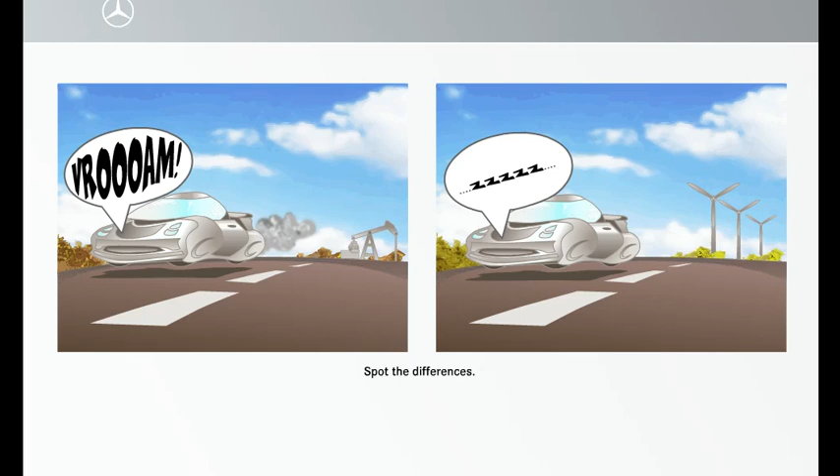Welcome to the CBT program on alternative drive systems, which gives you a solid introduction to alternative drives by providing a general overview of this topic.

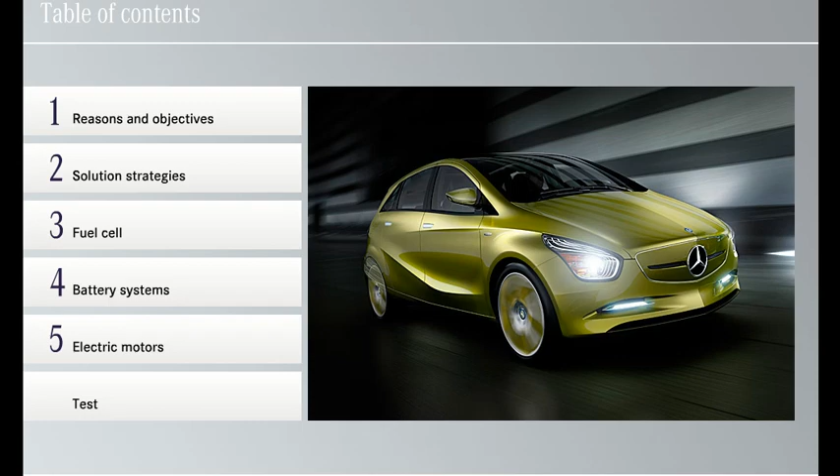The planet's reserves of crude oil are not infinite. How is our consumption of this fossil resource progressing? Since the turn of the 20th century, the extraction of oil has increased incessantly, interrupted only by the two oil crises. A reversal of this trend is currently emerging.

The oil fields which can be easily developed are no longer abundant in oil, while few new oil fields are being discovered. According to the peak oil theory, this means that half of the planet's resources of crude oil have been depleted. At the same time, demand for crude oil continues to grow. On top of this, the process of extracting the remaining oil is becoming increasingly time-consuming. The upshot of all this is increasing oil prices.

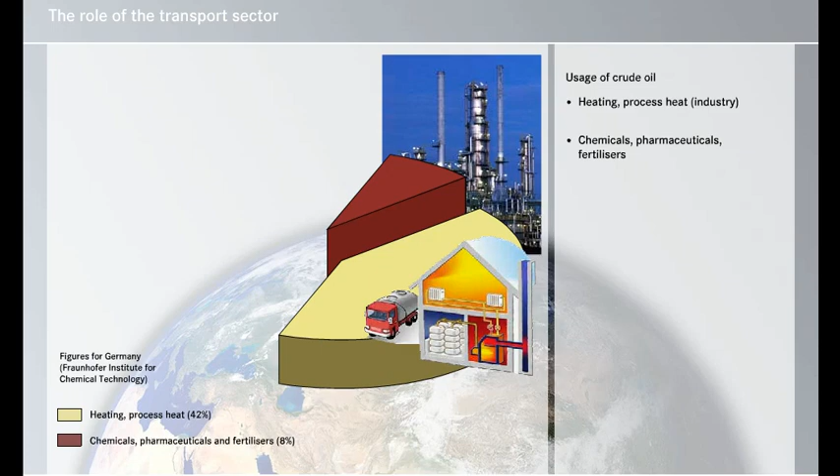Crude oil has a whole variety of uses. A large proportion is, for example, used for heating, for the manufacture of pharmaceuticals and chemicals, of which fertilizers account for a large quantity, for making plastics, and of course, for fuels: petrol, diesel, and kerosene. The global transport sector as a whole represents the largest consumer of crude oil, with around 46% of total consumption.

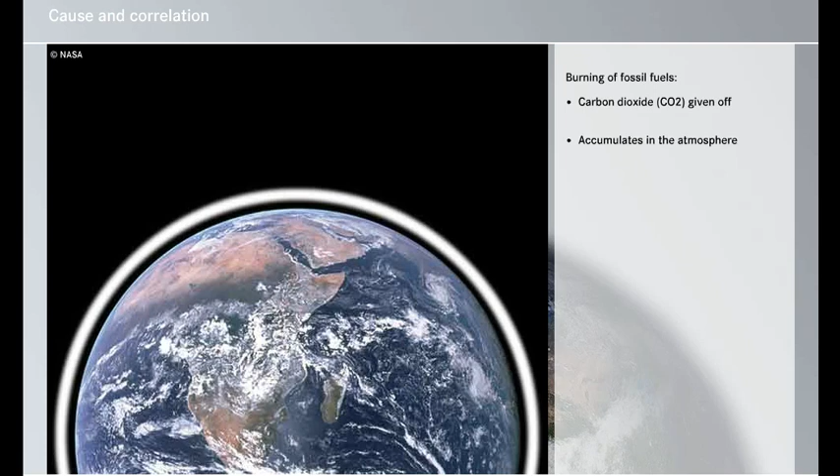When fossil fuels such as coal, oil, and natural gas are burned, they give off carbon dioxide, or CO2 for short. Although this gas is not toxic, it accumulates in the atmosphere. This has the same effect as the glazing of a greenhouse. Sunlight can enter, but the heat cannot escape.

The result of this greenhouse effect is that the Earth's surface, the oceans, and the atmosphere are becoming warmer, something which has predictably dramatic consequences for life on our planet, not just biologically speaking, but in economic and social terms too. However, there is a burgeoning global demand for improved quality of life and especially mobility. This has so far led to a steady increase in CO2 emissions. If you wish to learn more about the CO2 cycle, click on Extra Info.

The counter-argument is that humans and animals breathe out carbon dioxide too, and that the gas is also released by decaying plant life. This is indeed correct, but the fact is that the same quantity of carbon dioxide has previously been absorbed by plants through photosynthesis. It forms part of a cycle that has been continuing for thousands of years.

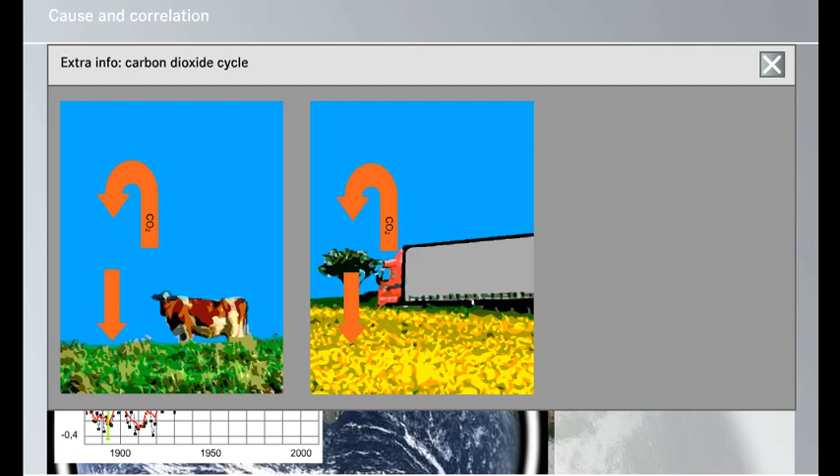The same is true of biofuels, meaning they can be designated nearly CO2 neutral, assuming that cultivation and processing have been carried out in an ecological manner. The decisive factor for climate change is the additional CO2 that is produced by the combustion of fossil substances and upsets this balance.

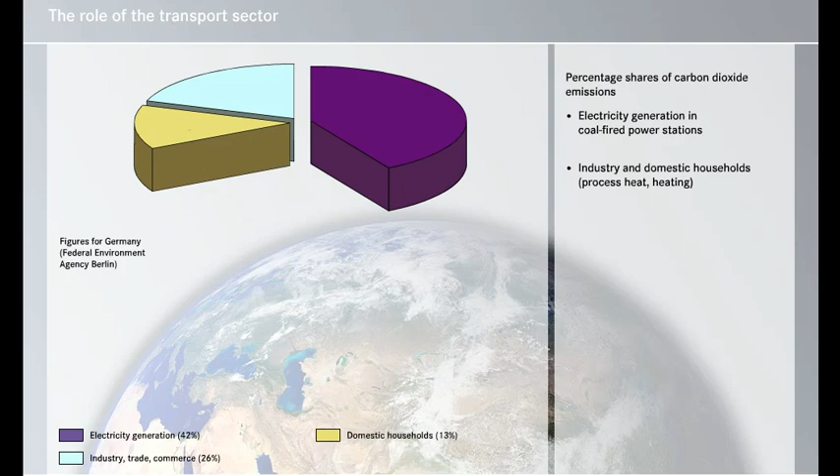What does the breakdown of CO2 emissions look like? The lion's share can be attributed to the electricity industry, which produces energy in coal-fired power stations. This is followed by industry and domestic households, where heating is needed for manufacturing processes and comfortable living respectively. Transport worldwide, meanwhile, only ranks third for CO2 emissions, with just over 20% of the total.

In order to halt climate change, CO2 emissions from all sources have to be cut. In other words, from electricity generation, from industry, from households, and from the transport sector. Politicians are attempting to steer the course of development by imposing general requirements, which vary from region to region. In the European transport sector in particular, CO2 emissions from passenger cars are meant to be reduced to an average of 120 grams of CO2 per kilometre by the year 2012.

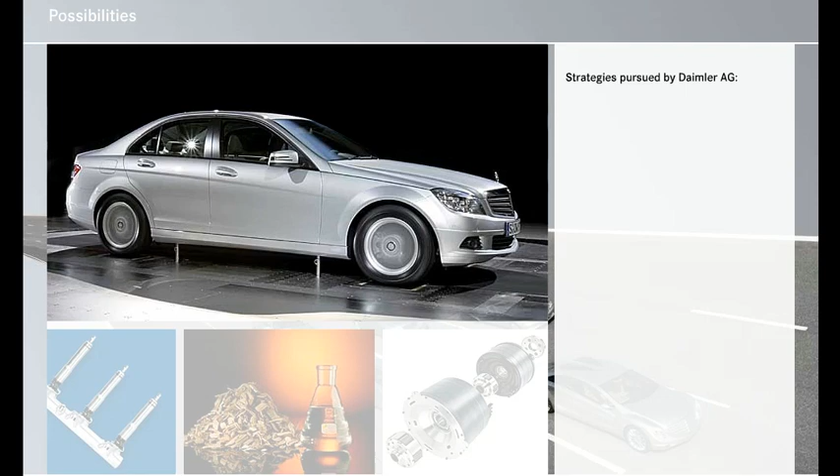There are various strategies for reducing CO2 emissions and fuel consumption, which are all being pursued at Daimler AG. Optimization of the vehicles in terms of rolling resistance, aerodynamics, and weight. Optimization of the internal combustion engines. For example, petrol engines with direct injection technology, known as CGI for short, or low-emission BlueTEC diesel engines.

The development and deployment of alternative fuels such as natural gas, biofuel additives, synthetic fuels, and second-generation biofuel, which can all be used in conventional combustion engines with either little modification or no modification at all.

And finally, the development and application of alternative drive systems, such as the hybrid drive, the fuel cell drive, and the electric drive. This CBT program deals exclusively with the latter of these, alternative drive systems.

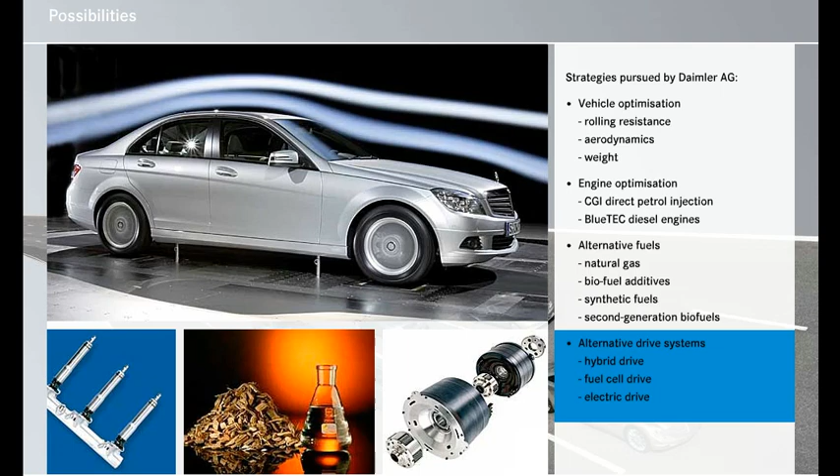Alternative drives are suitable for reducing fuel consumption, thereby lowering emissions in general, but most importantly, CO2 emissions, and increasingly for harnessing renewable energies too. If you wish to learn about the difference between fossil fuels and renewable energy sources, click on Extra Info.

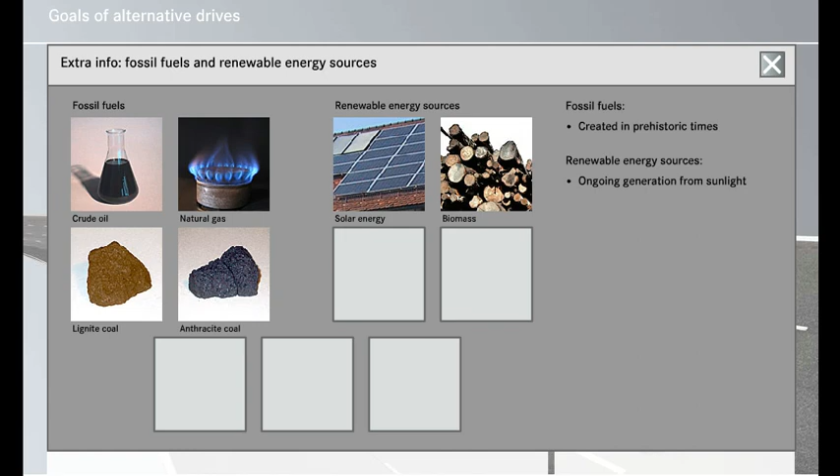Fossil fuels developed in prehistoric times from plant and animal material. They include crude oil, natural gas, lignite coal, and anthracite coal. Renewable energy sources are derived on an ongoing basis from sunlight. They can be infinitely replenished, i.e. renewed, hence their name. They include not only sunlight itself, but also biomass, wind energy, and hydropower.

The only other resources on Earth are primary energy sources, which date back to the creation of the solar system. Radioactivity, for example, in the form of uranium, geothermal energy, as well as the tides, whose origins lie in the movement of the celestial bodies. As the planet's reserves of uranium are limited, they are often counted as a fossil fuel, while geothermal energy and tidal movement are classified as renewable energy sources due to their virtually inexhaustible nature.

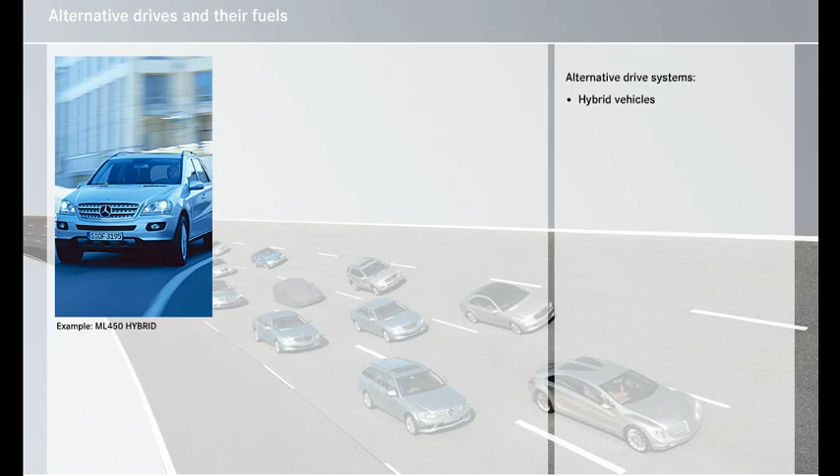The following types of alternative drive are to be examined in greater detail: hybrid vehicles, fuel cell vehicles, and electric vehicles. What fuels do these various alternative drives run on? Hybrid vehicles are refueled in the conventional manner with petrol or diesel. Fuel cell vehicles are powered by hydrogen, and electric vehicles run on electricity.

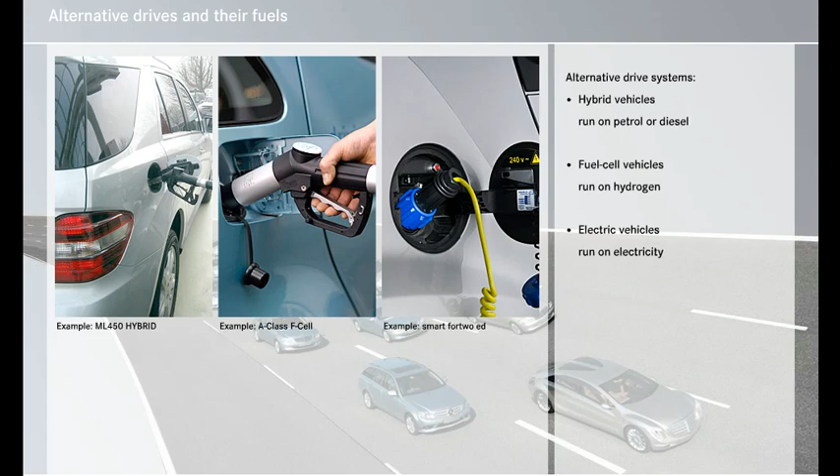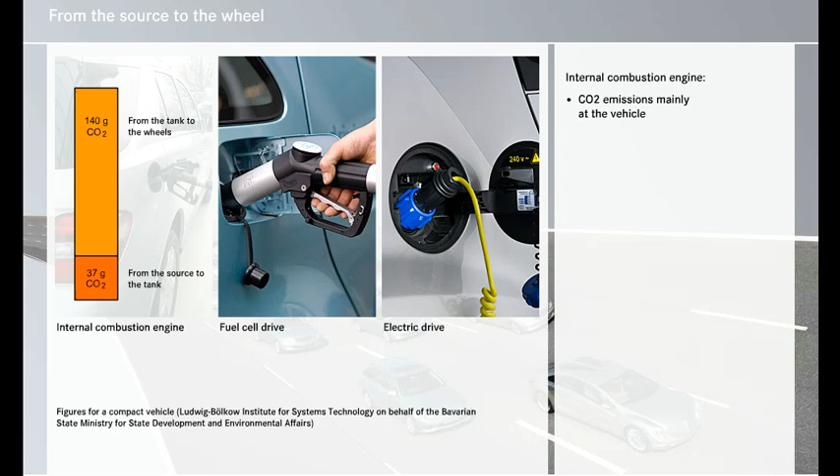However, the whole climate and resources issue has to be considered from a wider perspective, from the original source of energy all the way to the moving wheel. On a hybrid or a conventional petrol or diesel-powered vehicle, the majority of the CO2 release takes place at the vehicle itself. Only a relatively small proportion occurs during extraction and transport of the crude oil and manufacture of the fuel.

Although operation of a fuel cell-powered vehicle is emission-free, the overall CO2 balance sheet is not necessarily that much better. Currently, hydrogen is produced from natural gas or accumulates during the smelting of iron ore. Both processes give off CO2, so it is not produced at the vehicle but at the fuel supplier instead.

It is a similar story for electric vehicles. Part of the electrical power required comes from coal-fired power stations with relatively high CO2 output. Some of the electricity is also drawn from atomic power and renewable energy sources, which are, however, CO2-free. The balance sheet is far more positive if the electrical power is generated from renewable sources, such as the sun, wind, and water. In other words, without any release of CO2.

And if this electrical power is used to generate hydrogen by the electrolysis of water, the overall CO2 balance sheet likewise improves. Liquid fuels can, however, also be produced using renewable means. Currently, field crops are used, but in the future, it will be possible to extract biodiesel, as it is known, from any plant material, such as wood residue, straw, or grass and tree cuttings. This will cancel out the vehicle emissions, although some CO2 will still be generated as a result of cultivation, extraction, and manufacture.

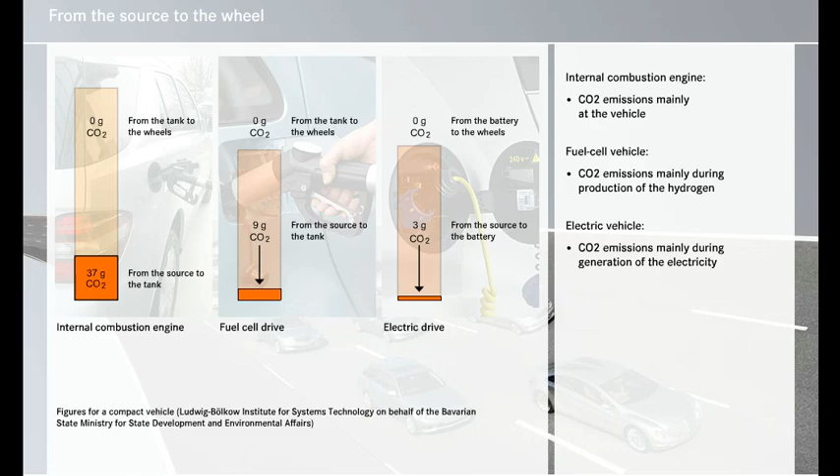Let us now consider the principal characteristics of hybrid vehicles. Hybrid vehicles have at least two drive units: a combustion engine and an electric motor, which is integrated into the transmission on this model. Engine and motor can each be deployed on their own or in unison with one another in order to optimize operation in terms of energy consumption. When kinetic energy is released, for instance, while driving downhill or braking, i.e. with the engine in overrun mode, the electric motor acts as a generator.

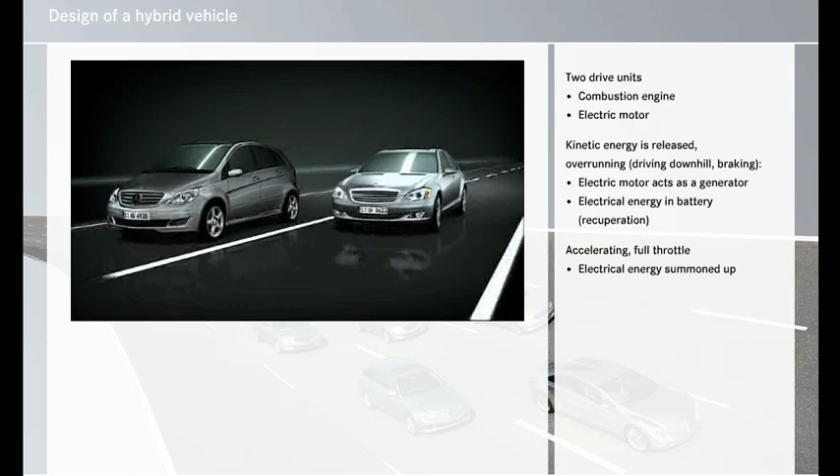The electrical energy is stored in a battery. This process is known as recuperation. When accelerating or at full throttle, the released energy can be reused. The electric motor helps the combustion engine to power the vehicle.

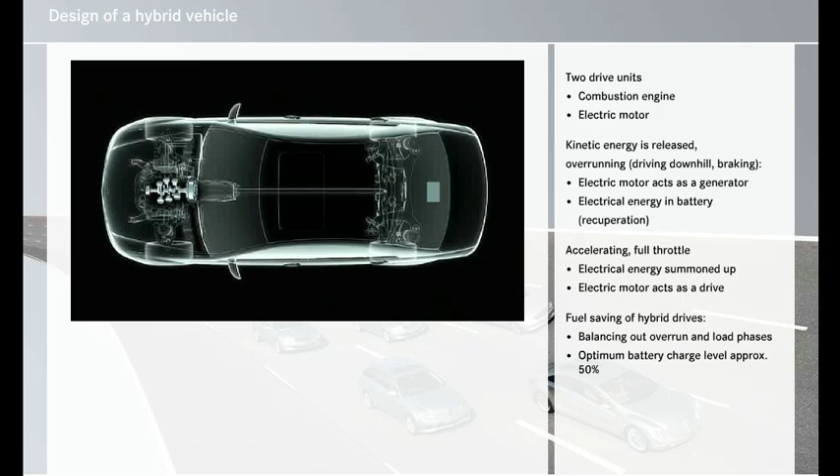The advantages of the hybrid drive are lower fuel consumption, resulting in lower CO2 emissions too. Besides this, there is a further plus point too, namely increased torque. As you will find out in Chapter 5, electric motors, unlike combustion engines, generate their maximum torque from stationary. So not only is environmental compatibility increased, driving pleasure is boosted too.

This comes at the expense of a number of drawbacks, however. Increased technical complexity resulting from the two drive types, combustion engine and electric motor. A higher weight due to the additional components, as well as the resulting increase in costs.

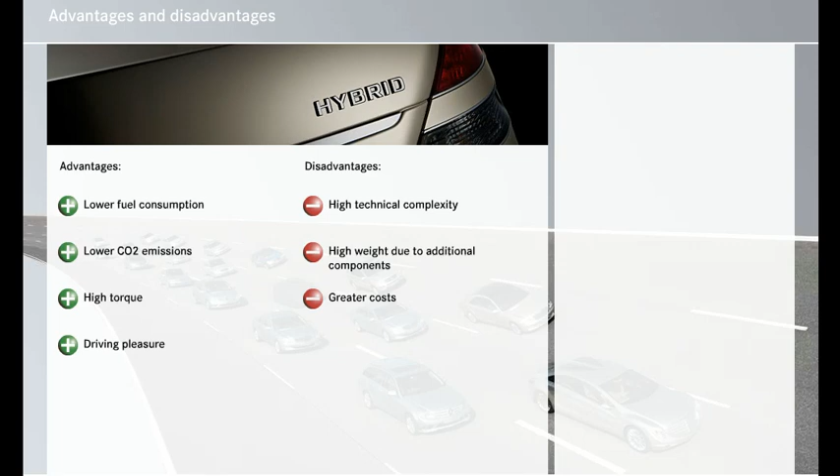The pros and cons of the various drive setups need to be weighed up carefully to evaluate the impact on fuel consumption and CO2 emissions. A vehicle which is predominantly driven in city traffic, stopping and accelerating frequently, can benefit from a hybrid drive system. However, a vehicle which is largely driven at a constant speed over long distances should not be burdened by the extra weight of the hybrid drive technology. In this case, a modern diesel engine proves to be more efficient.

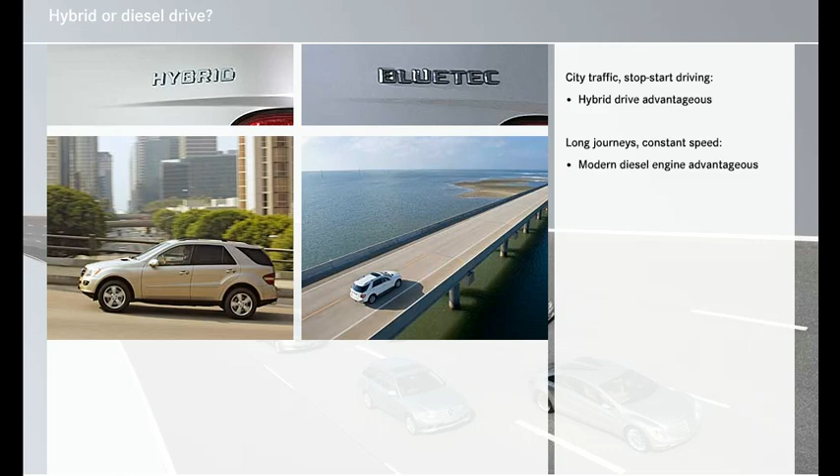Now let's take a look at the fuel cell drive. Hydrogen, which is stored in compressed gas tanks, reacts with oxygen from the atmosphere to generate electrical energy in the fuel cell, which is in turn used to feed the electric motor. In overrun situations, this electric motor is also able to function as a generator and convert kinetic energy into electrical energy. Consequently, a battery is also required in order to store the electrical power generated during overrun phases, or put it on tap again for peak load phases. Move the cursor over the diagram to display the various components.

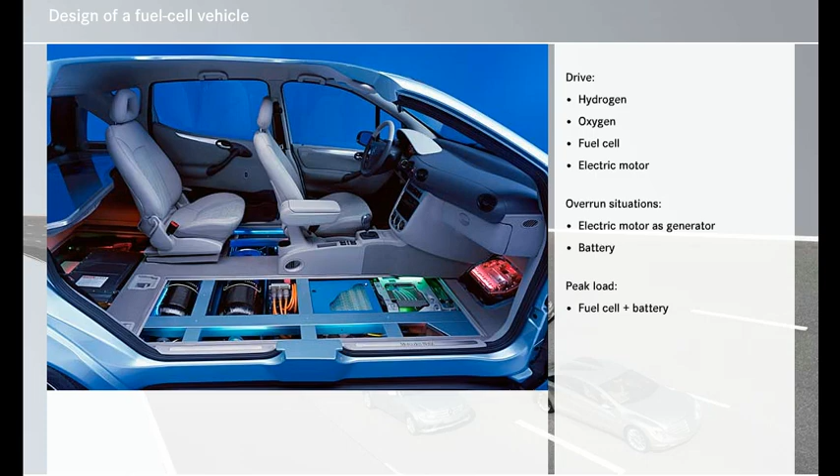The principal benefits of the fuel cell drive include the low energy consumption, as the fuel cell and electric motor convert energy more efficiently than any combustion engine is capable of doing. Absolutely no CO2 emissions at the vehicle. Only the water produced by the chemical reaction is emitted from the exhaust. Low noise emissions from the fans and the hum of the electric motor. And finally, impressive vehicle performance, as the electric motor delivers a high torque from standstill.

And what about the downside? The fuel cell drive still entails a great deal of technical effort. The fuel cell drive, together with all of the ancillary assemblies, is heavier than an equivalent combustion engine. The high manufacturing costs for the fuel cell and battery are another major factor. These should both become cheaper to make over the course of future development, however.

A further challenge lies in store in areas that are outside Daimler AG's direct scope of influence. Hydrogen would have to be manufactured in far greater quantities for the fuel cell to become a widespread means of powering vehicles. This should furthermore be carried out in an environmentally friendly manner by employing renewable energy sources. Click on Extra Info for an overview of the different ways in which hydrogen can be produced.

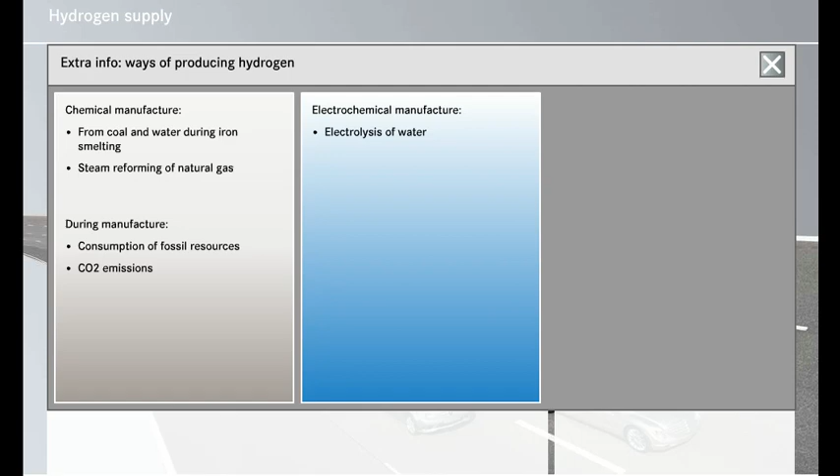Hydrogen can be manufactured by chemical means. It accumulates during iron smelting, for example, when iron ore, coal and water are heated in the blast furnace. Natural gas can also be steam reformed, a process which produces hydrogen and carbon dioxide. In both of these cases, however, fossil resources are used in the hydrogen's manufacture and CO2 is given off. Hydrogen can also be obtained from the electrolysis of water. In this instance, the consumption of resources and CO2 emissions depend on how the electricity is generated.

Biological manufacture is likewise possible, using biomass, for example, and steam reforming of the generated biogas. Research is also currently being carried out into the possibility of manufacturing hydrogen directly from special algae. Here, the environmental balance sheet depends on the cultivation concept used. In the case of sustainable cultivation, no consumption of resources takes place, as the hydrogen production process only releases as much CO2 as was previously absorbed by the plants.

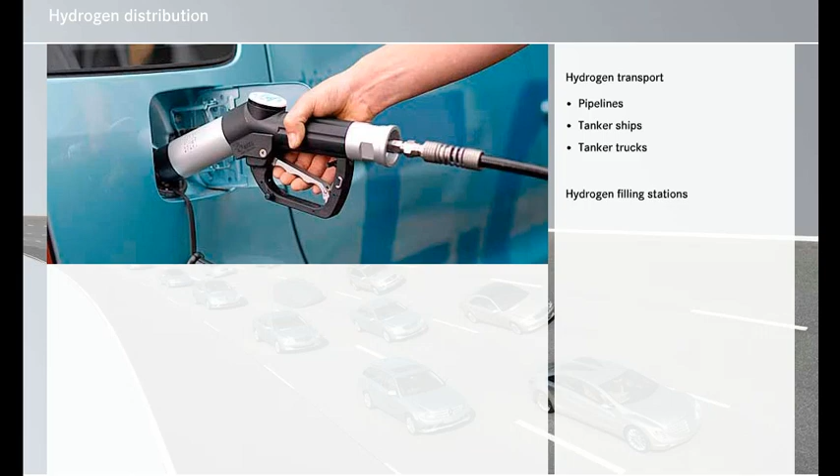To make vehicles with fuel cell drives a viable alternative, a supply of hydrogen fuel also has to be made available. This requires special pipelines, tanker vessels, tanker trucks, and fuel dispensers. Currently, there is only a small number of hydrogen filling stations in the main metropolitan areas, of which only a handful stock compressed hydrogen at 700 bar, as favoured by Daimler AG. Their number must increase dramatically before fuel cell-powered vehicles become an attractive option for customers. Daimler AG is collaborating with the relevant fuel producers in all of the areas just discussed.

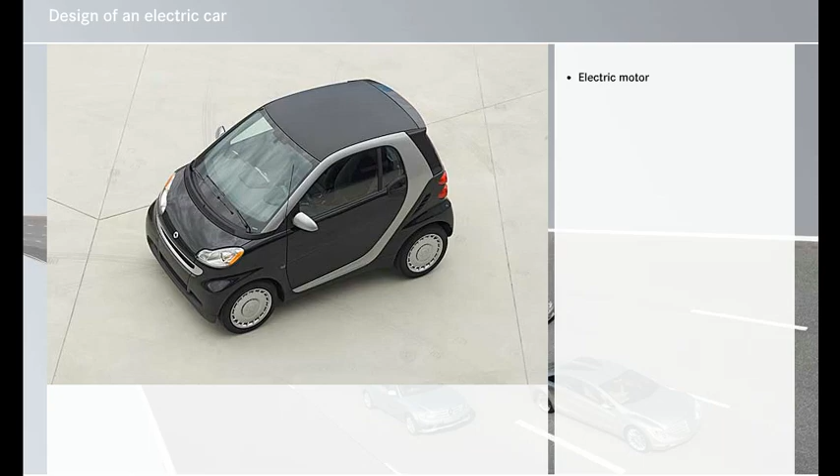An electric vehicle is fitted with an electric drive motor, just like on a fuel cell vehicle. But there is no hydrogen tank or fuel cell. Here, the electrical power originates from a battery. This is larger than that found on a hybrid or fuel cell vehicle, however. After all, it has to store the entire drive energy and not just surplus energy for load peaks. This energy is then dispensed to the electric motor via the onboard power electronics. The electric vehicle's battery is charged from the mains supply. Move the cursor over the diagram to display the various components.

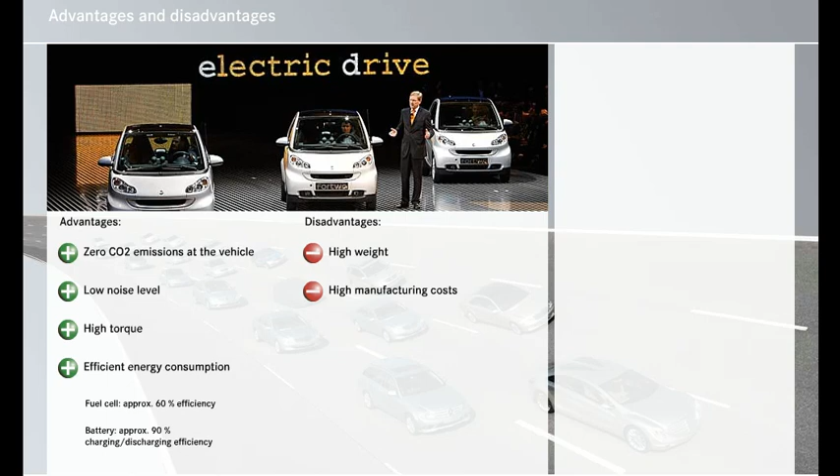A further drawback is the short vehicle range at the present time, as the battery can only store a limited amount of energy. Today's battery technology is only suitable for compact cars, and even then for no more than the short everyday journeys. Only compact cars can be plugged into a standard domestic power socket and recharged in a reasonable period of time, for example overnight, whilst at work or at a park and charge station whilst doing the shopping. A new infrastructure would be needed to allow rapid charging of large vehicles within a matter of minutes, i.e., in a comparable time to that required for refueling.

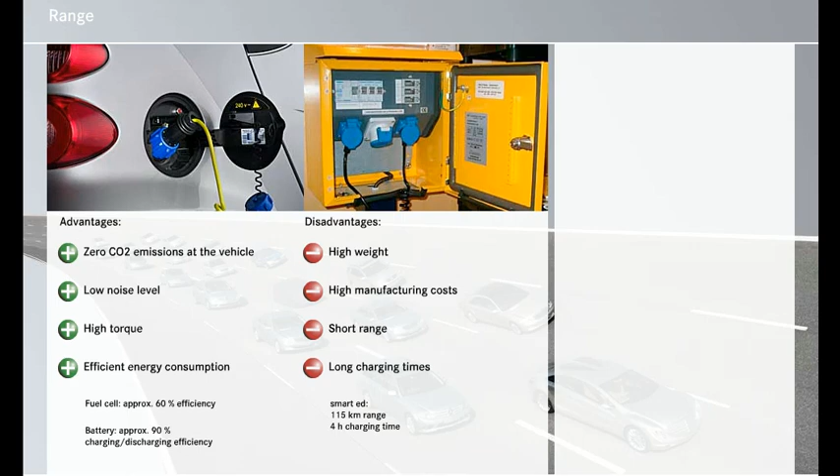Daimler AG is pursuing all of the possibilities just outlined. The following models are already on the market, are currently being tested in fleet trials, or will be brought out between now and 2010. Various hybrid drives in smart and Mercedes-Benz passenger car, van, truck and bus models. Fuel cell drive in the B-Class as well as in vans and buses. And electric drives in the smart and the future B-Class. The alternative drives also undergo ongoing development in research vehicles and studies.

Can you recognize the alternative drives shown here? Label the vehicles correctly by dragging the matching descriptions to them. Then click on OK. Excellent. The hybrid vehicle can be recognized from the cylinders of the combustion engine. The other models have just an electric motor. This is fed by the battery alone on the electric vehicle and primarily by the hydrogen-powered fuel cells on the fuel cell vehicle.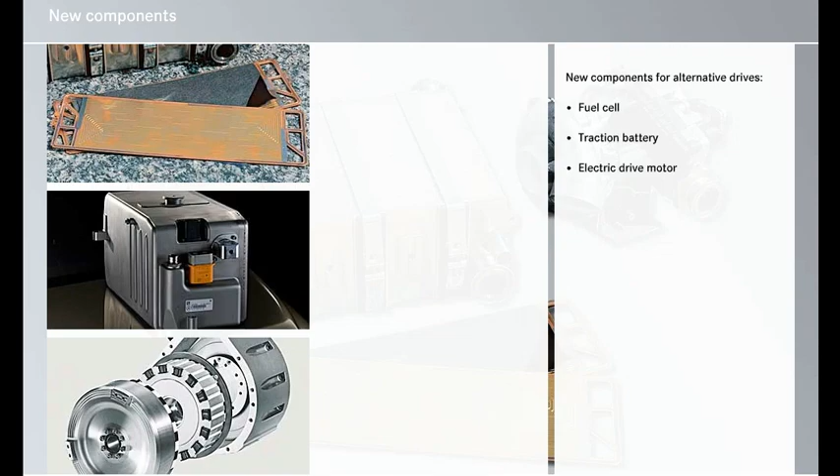New components are encountered in vehicles powered by alternative drive systems. The fuel cell, a traction battery, and an electric motor. The pages that follow give you a general idea of the basic workings of these new components. The chapter starts with a look at the fuel cell. Fuel cells convert hydrogen and oxygen into water. At the same time, the chemical energy released by this process is not dissipated as heat, as it is with combustion, but transformed directly into electrical power instead.

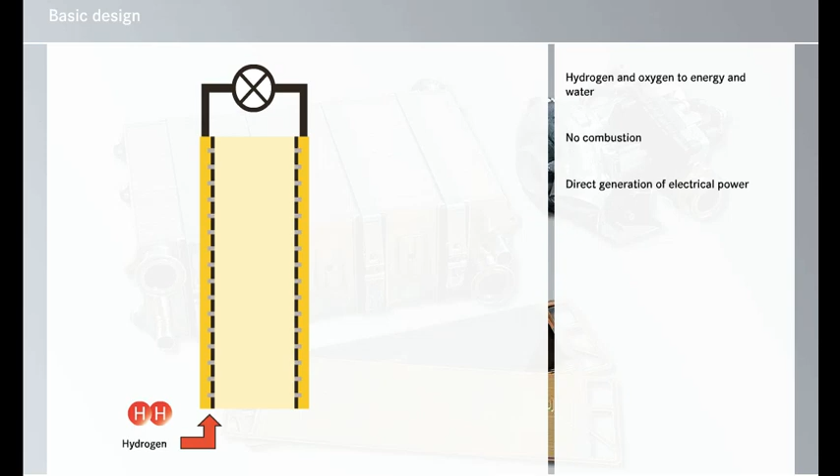The hydrogen is taken from the compressed gas tank and fed into the channels of one of the electrodes. A blower directs ambient air with the oxygen it contains into the channels of the other electrode. The sole product of the reaction is water. The air's nitrogen content passes through the fuel cell unchanged. The low operating temperature means that, unlike in combustion engines, no nitrogen oxides are produced.

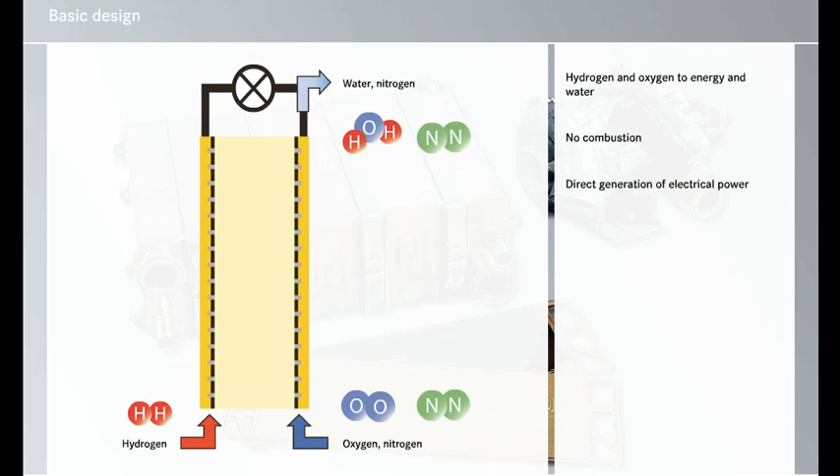The transformation in the fuel cells takes place in a number of steps, as follows. The hydrogen molecules are split into hydrogen ions and electrons at the catalyst on the electrode. The electrons flow through the external circuit, serving, amongst other things, to power the vehicle. At the other electrode, the oxygen molecules are split at the catalyst and bond with the electrons to form oxygen ions.

The hydrogen ions diffuse through the membrane. The special membrane can only be permeated by the ions and not by molecules or electrons. The hydrogen ions and oxygen ions join to produce water, which is then discharged.

One single fuel cell supplies a voltage of around 1 volt. By connecting lots of fuel cells in series to form a stack, the voltage is multiplied accordingly. In this way, outputs of several hundred volts can be achieved, which can then be used as a source of propulsive power.

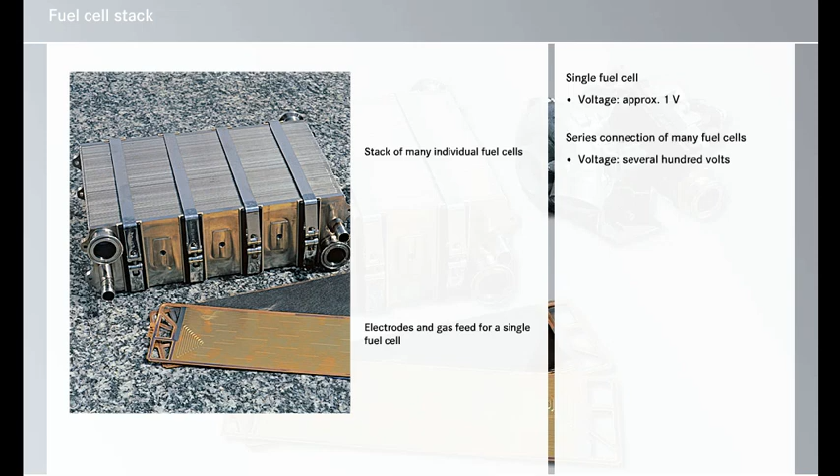What benefits does the fuel cell have to offer? Well, the reaction is a cold electrochemical one and not thermal in nature. The principle of thermal transformations, such as those that take place in internal combustion engines, means that losses are unavoidable. Not in the fuel cell, though. Consequently, its efficiency ratio is really high and currently lies at around 60%.

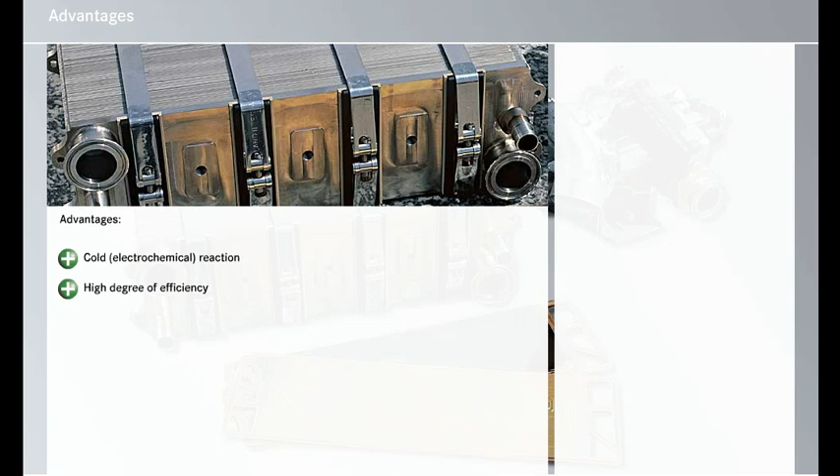There are no harmful exhaust gases. The only emission produced by the fuel cell is water or water vapor. The only noise is that made by the blowers propelling the gases. The fuel cell furthermore has no moving parts, meaning there is zero mechanical wear. The only wear is that resulting from gaseous catalyst poisons, which is why these have to be regularly rinsed out.

If you would like to discover what the fundamental difference is between an electrochemical and a thermal reaction, click on Extra Info.

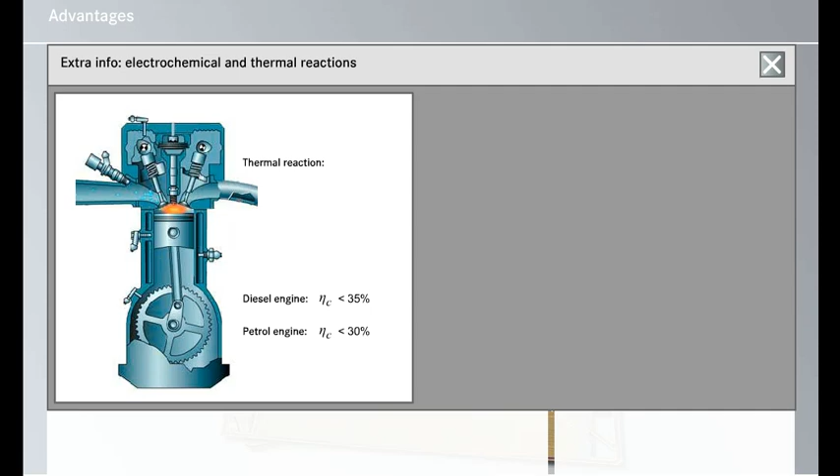On thermal motors, which include combustion engines, the degree of efficiency depends on the difference between the highest and lowest temperatures in the process. This is the theoretical limit, which is never actually attained in practice, however. Realistic efficiencies are 35% for diesel engines and 30% for petrol engines. The remainder is lost in the form of heat.

A fuel cell, on the other hand, has a theoretical efficiency of 100%, although this drops as the temperature rises. 60% is achieved in practice. The aim is to reach 85%.

The fuel cell works, as has been demonstrated by several generations of prototype vehicles from Daimler AG. Besides this, no other manufacturer has such a large fleet of test vehicles in customer hands. Nevertheless, a number of challenges still need to be overcome before series production can start.

At the present time, a fuel cell drive would still be expensive for the private end user. Costs have already fallen substantially over the course of development to date, though. If this trend continues, a fuel cell vehicle could become economically viable.

The first generation of the fuel cell filled an entire van, the NECAR 1. Despite its higher power output, the current generation fits into the underfloor cavity of an A-class or B-class. Reducing the weight and space required is not just important for accommodating the technology in the vehicle, however, it is also the key to reducing costs.

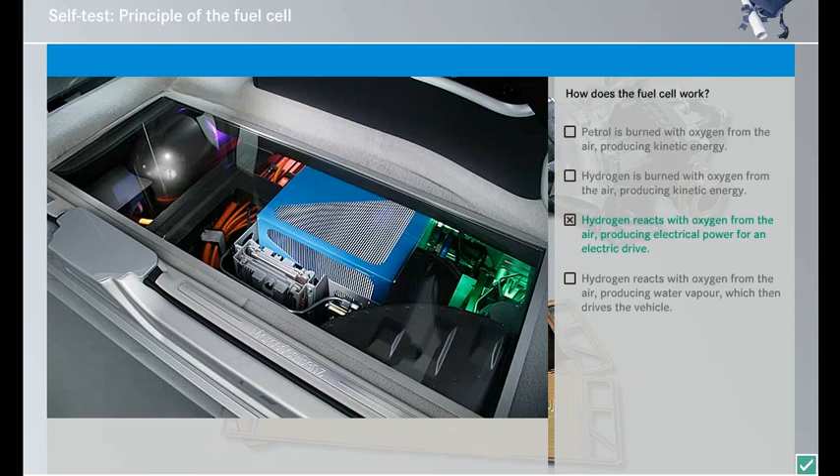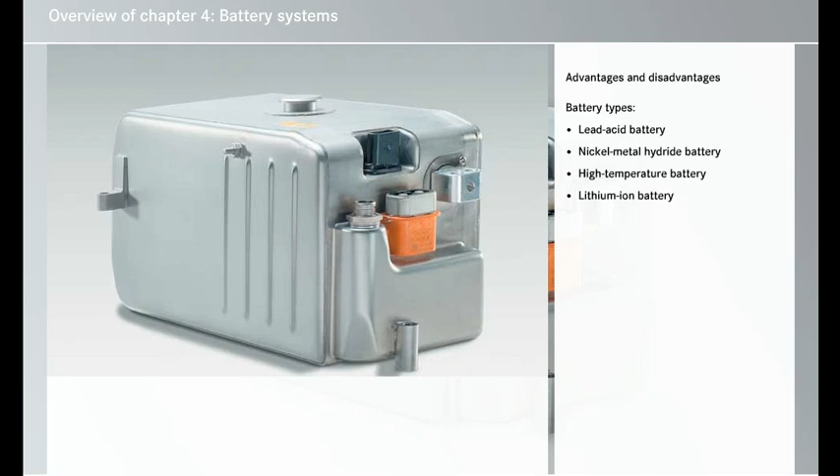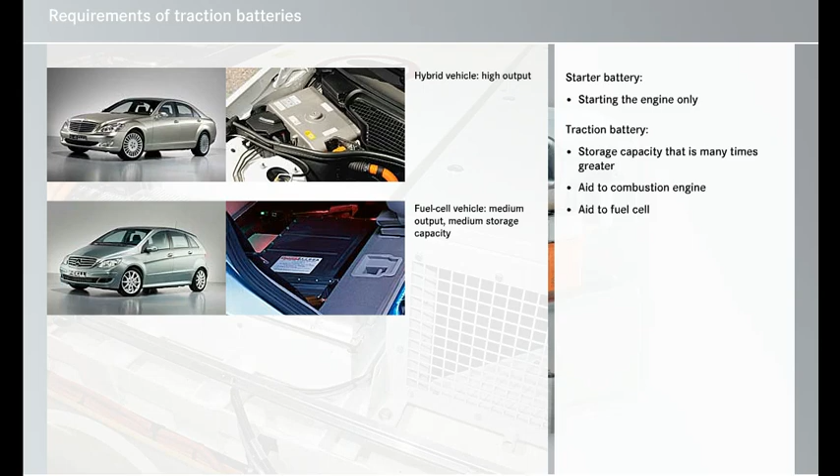The batteries used in alternative drive systems are subject to a quite different set of demands than conventional starter batteries. After all, they have to do far more than just start the engine. A traction battery must be capable of storing larger quantities of energy and delivering an electrical output that is many times higher. The specific requirements vary depending on whether the battery is acting as an aid to the combustion engine or the fuel cell, or actually serving as the sole energy source for the electric drive.

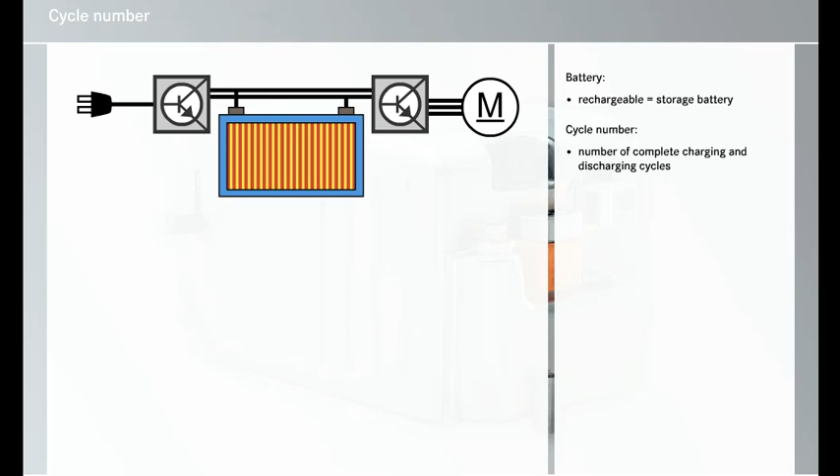Batteries for alternative drives also have to be rechargeable. The batteries used, therefore, are storage batteries. The cycle number indicates how many times the battery can be fully charged and discharged before it can no longer be used for the intended application. Today's traction batteries manage up to 1,000 complete charge and discharge cycles. Because the battery in hybrid vehicles is generally only partially discharged, then immediately recharged, the cycle number is much larger. This is sufficient to safeguard operability throughout the average vehicle service life.

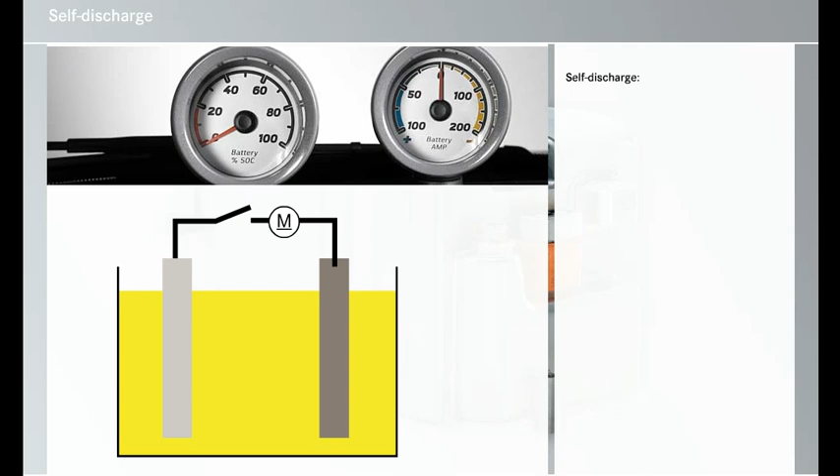Self-discharge of batteries is a particularly important consideration in the case of electric vehicles. Even when it is not in use, a battery loses energy due to internal chemical processes. Depending on the battery system, as well as the age and temperature of the battery, self-discharge varies between a few % and complete discharge in 1 month.

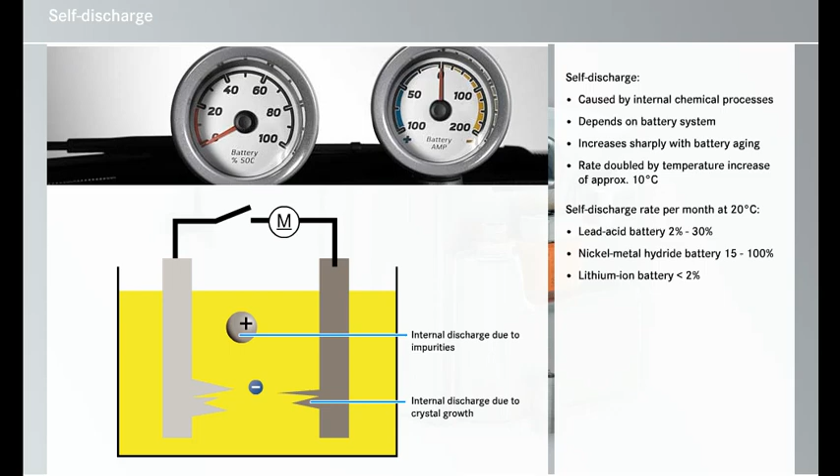Another key variable is the energy density of batteries. This refers to the energy in watt-hours per kilogram of battery. Sometimes, the energy is also stated in reference to the volume if the space required is a decisive factor. The higher the energy density, the further the car can drive on electrical power for a given battery weight. Or, expressed in different terms, the higher the energy density, the lighter the battery can be for a given electrical range. The energy density of batteries is low compared to other energy storage media. It is only 1/100th that of petrol, for instance. Development is not standing still, however, as you can observe from the following comparison of different battery types.

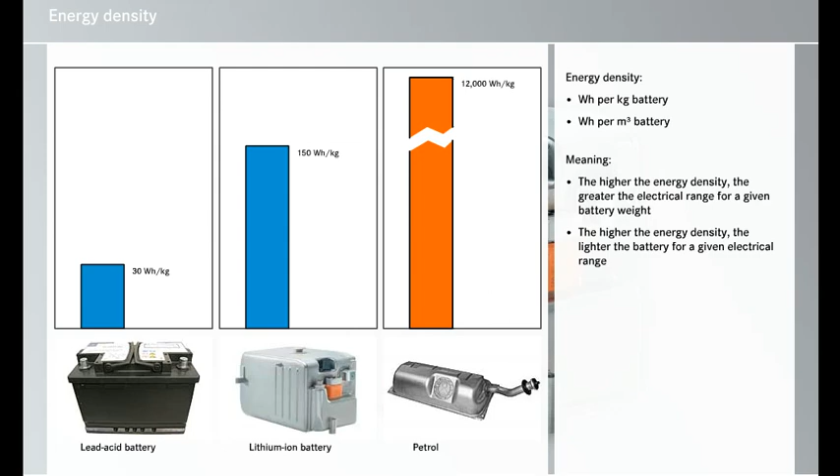The lead-acid battery has been successfully used as a starter battery for many decades now. This is where its advantages lie: the proven technology and the cost-effective production. It is ill-suited to use as a battery in alternative drive systems, however, as its energy density is low, and the electrodes suffer from mechanical instability when the battery is completely discharged. The only application is in micro-hybrid vehicles, where a more robust version, known as an absorbent glass mat or AGM battery, is used. This battery is able to withstand the typical charging and discharging processes of this hybrid type. You can find out more about the various hybrid types in Part 2 of this CBT series.

The nickel-metal hydride battery, or NiMH battery for short, is suitable for use as a buffer battery in hybrid vehicles. It offers the following advantages. The technology is robust, being the same as that used in many battery-powered appliances, and its energy density is superior to that of lead-acid batteries. On the downside are the high self-discharge rate, especially when fully charged, and the low number of cycles if left to fully discharge over a longer period of time. There is also the nickel-cadmium battery, a close relation with only slightly different properties that is described in the Extra Info section.

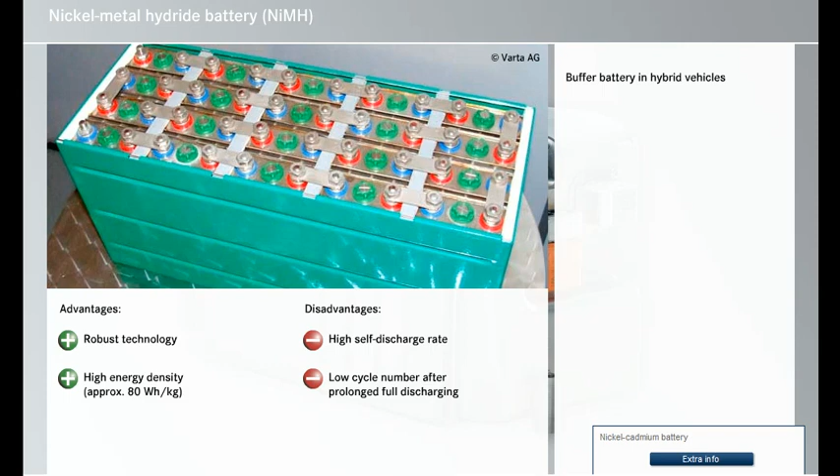The nickel-cadmium battery was a precursor to the nickel-metal hydride battery. Its properties are similar, but it is more robust, particularly in terms of its resilience to total discharging, which is why it is used in electric vehicles. It has other drawbacks, however. The memory effect, as it is known, reduces the energy storage capacity if the battery is recharged when it has only been partially discharged. As this is the case virtually constantly in hybrid vehicles, this battery is not suitable for such applications. It contains highly toxic cadmium. This metal is now prohibited in domestic batteries. Due to the 100% recycling process, however, an exception is made for industrial applications, particularly when used as a traction battery in alternative drive systems.

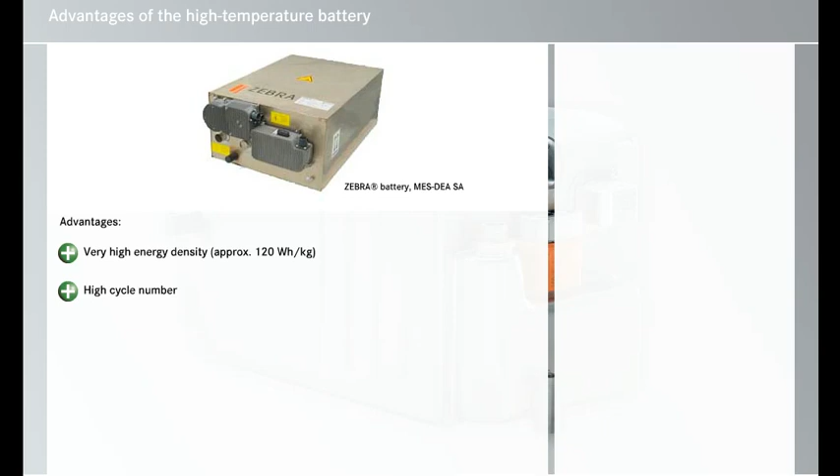The high-temperature Zebra battery possesses a whole series of ideal characteristics. It has a very high energy density, can withstand a high number of cycles, and has a negligible rate of self-discharge. It also contains no toxic or rare and therefore expensive materials. At first glance, it would therefore seem to be the ideal solution for alternative drive systems, especially in electric vehicles.

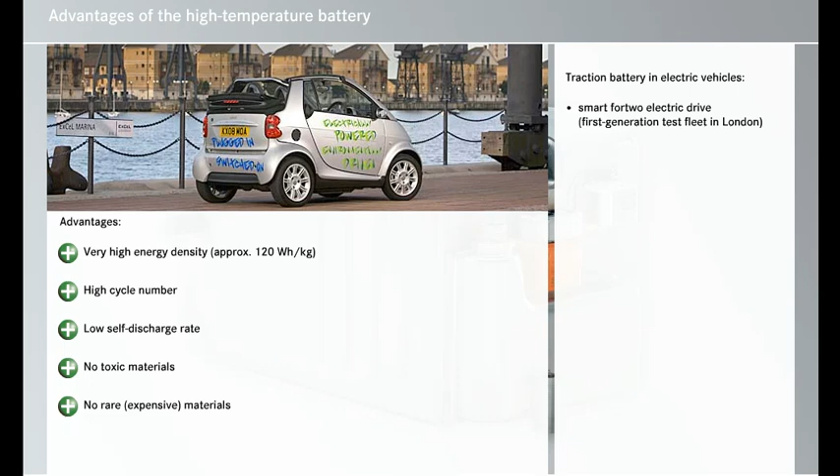Melts of sodium and nickel chloride salts are used as electrodes. These have to be heated up to temperatures of between 280 and 350 degrees centigrade to allow them to absorb and discharge electricity. And this is where the major drawback lies. The battery has to be thermally encapsulated to prevent excessive temperature losses. Some thermal release is unavoidable, meaning that the battery must be heated to maintain the correct temperature. This uses up a portion of the stored energy.

If the battery was shut down, it would be electrochemically stable, but it would take a long time to heat up before being operable again. The alternative is to heat the battery from the mains supply while the vehicle is not in operation. From an energy consumption point of view, this is only worthwhile for vehicles which are used frequently. Move the cursor over the battery to familiarize yourself with its constituent components.

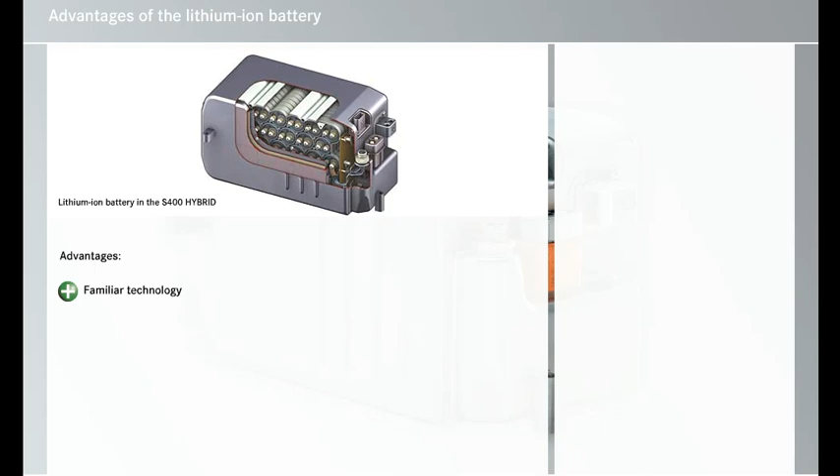The various versions of the lithium-ion battery are currently deemed to be the most promising option for alternative drives. They offer the following advantages. The technology is a familiar one that is employed in notebook PCs and mobile phones. The lithium-ion battery has the highest energy density of all the battery systems considered here. It has a high cycle number and a very low self-discharge rate.

Lithium batteries acquired a negative image, however. A small number of lithium polymer batteries fitted in notebooks were overcharged because of defective chargers and caught fire. Other variants of the lithium battery are earmarked for use in alternative drives at Daimler AG, however, namely the lithium-ion batteries, which are safer. Besides this, the cells are embedded in a gel, protecting them from shocks, and surrounded by a sturdy steel housing.

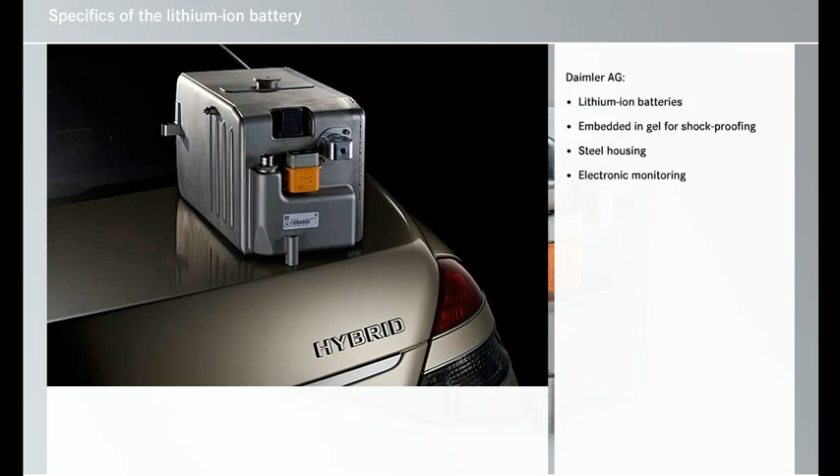In vehicles from Daimler AG, they are furthermore electronically monitored and also integrated into the air conditioning system circuit to keep them operating in an optimum temperature range at all times. If overheating should nevertheless occur, there is a vent opening for controlled reduction of the resulting pressure buildup. It is intended to use lithium-ion batteries as an energy storage medium in hybrid and fuel cell vehicles, as well as in electric vehicles.

In addition to the battery safeguards, further safety measures are to be incorporated into the vehicle itself. For example, all high-voltage cables are color-coded so that they are unmistakable. The insulation of the cables and connectors provides complete protection against electric shocks. In addition to this, apart from the actual battery, all of the other high-voltage components, such as the cables, power electronics and electric motor, are de-energized when the ignition is off.

And they are subject to permanent electronic monitoring when in operation. In the event of a short circuit or a possible malfunction, the supply of power from the battery is immediately cut off. The same is true when the safety system detects a collision via its crash sensors.

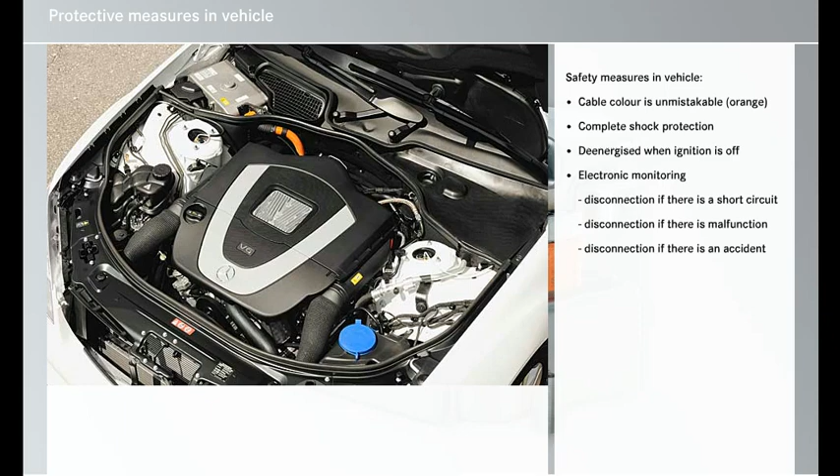Arrange these battery types according to their energy density. Drag the labels into the table as appropriate, then click on OK. You've been paying close attention. The familiar lead-acid battery has the lowest energy density, and the lithium-ion battery the highest.

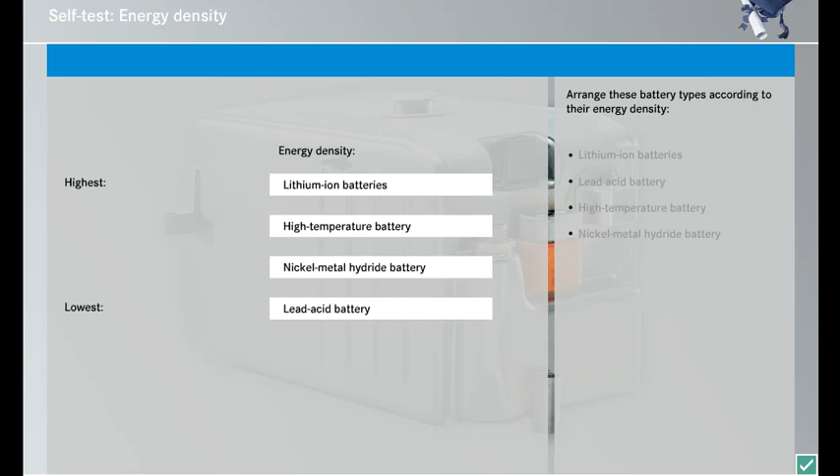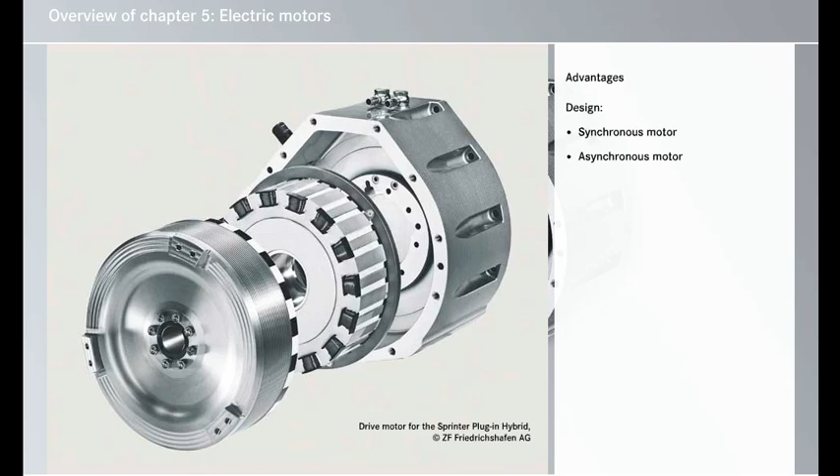Electric motors for vehicle drive systems have nothing to do with the electric motors used for windscreen wipers or power windows. After all, they have to provide a major boost to the combustion engine in hybrid vehicles, or act as the sole source of drive power in fuel cell and electric vehicles. The motors in question are three-phase alternating current motors. The following looks at two types of these, the synchronous and the asynchronous motor.

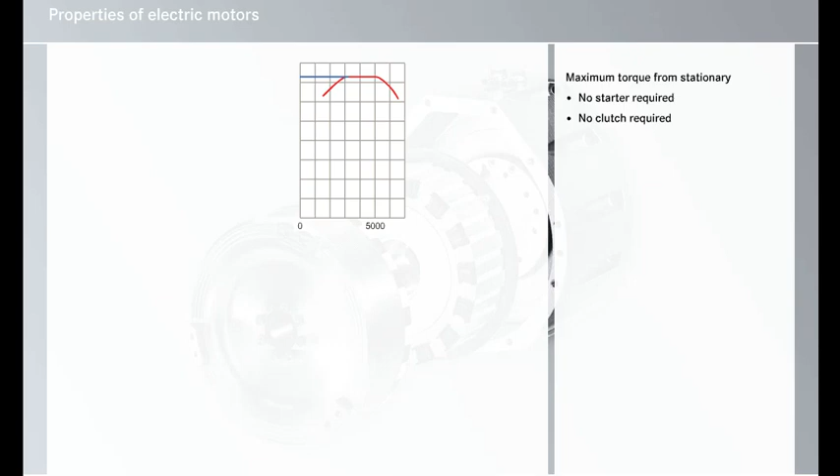Electric motors operate over a large rotational speed range, meaning that a transmission is often not required. The motor's direction of rotation can be reversed electronically, eliminating the need for a reverse gear. The upshot of all this is a simple powertrain. The crucial factor from an energy point of view, however, is that electric motors can function as both motors and generators. This allows kinetic energy to be recovered in a process known as recuperation.

Electric motors, furthermore, attain high efficiencies of as much as 90%. By way of comparison, the maximum efficiency ratio in practice of petrol engines is 30% and of diesel engines 35%. In other words, electric motors transform nearly all of the expended electrical energy into vehicle motion.

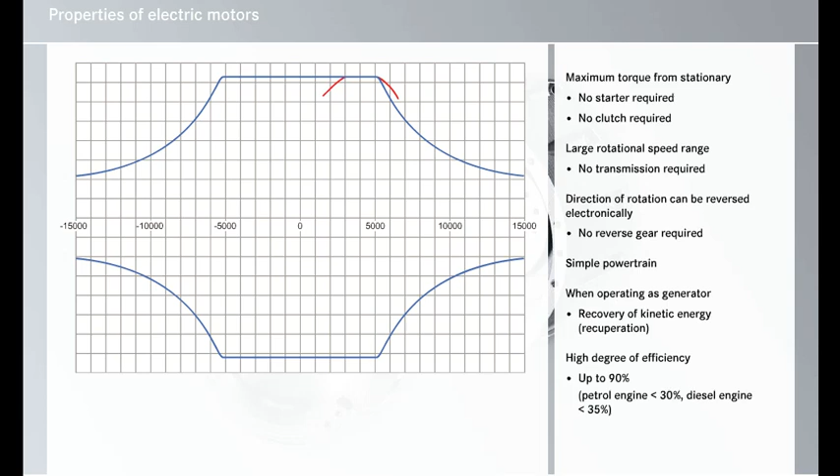Electric motors have a simple construction, comprising the fixed stator and the revolving rotor, the only moving part. The torque is produced by the interaction between the magnetic fields produced by stator and rotor. At least one of these two parts must be built using electromagnets. Here it is the stator. The rotor contains a permanent magnet.

The motor is controlled by an electronic circuit known as the frequency inverter. This supplies three-phase alternating current to the windings of the stator.

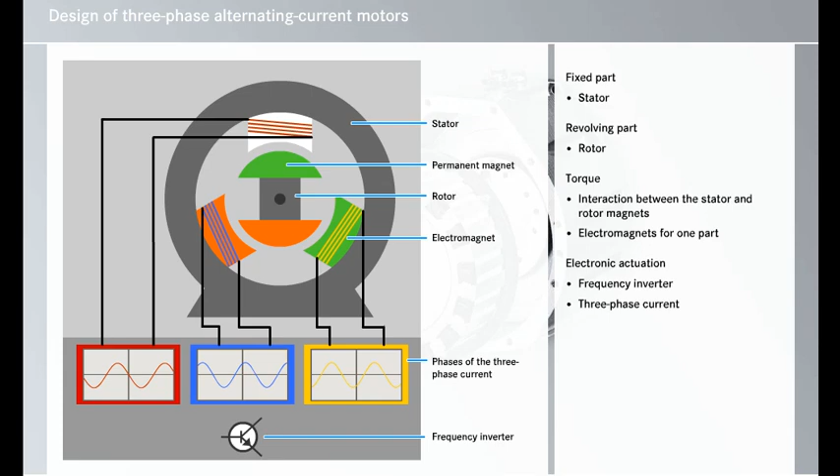On the synchronous motor, there are several magnetic windings contained in the stator. At least 3, as illustrated here, although many more are used in practice. The windings are connected to the motor control unit. The rotor contains a permanent magnet.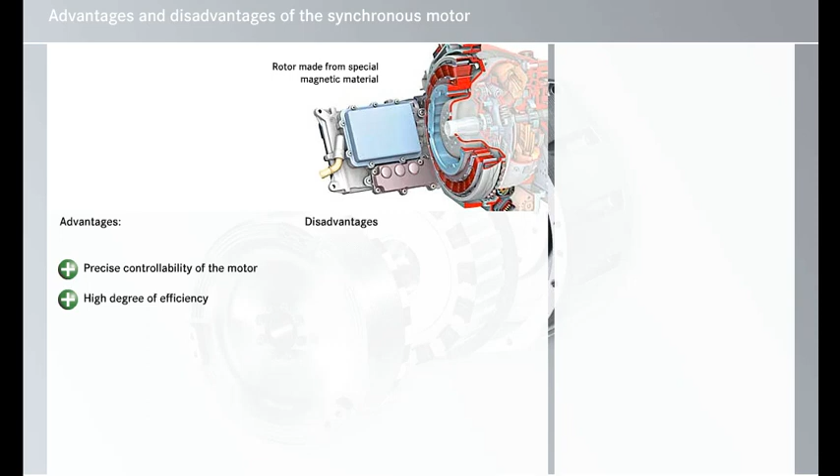In order to generate a powerful magnetic field, however, the rotor is not made from standard magnetite, but from a special alloy with stronger magnetization instead. This results in higher costs compared to the asynchronous motor described in the next section. This type of rotor is heavy too, meaning that the synchronous motor has a higher weight.

Due to its precise controllability, the synchronous motor is particularly suitable for operating in unison with a combustion engine in hybrid vehicles. However, it is also employed as the sole drive unit in more recent fuel cell vehicles and electric vehicles.

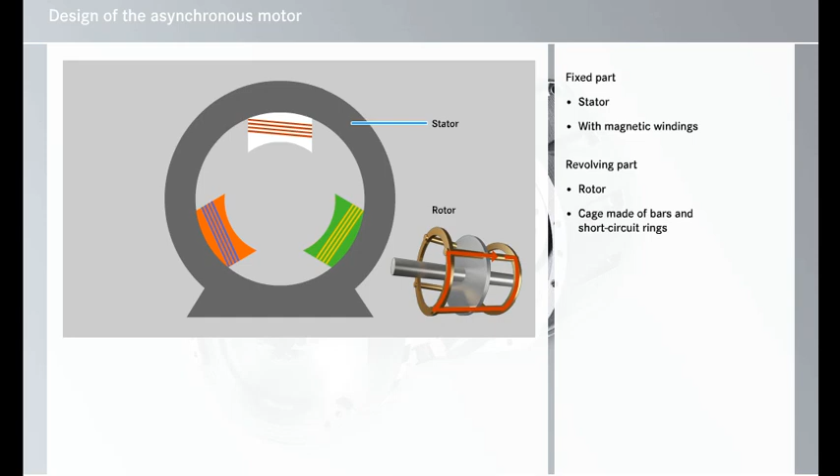Like the synchronous motor, the asynchronous motor features a stator with several magnetic windings. The rotor consists of a cage made up of several bars, which are held together at their ends by short-circuit rings. The bars, together with the short-circuit rings, form enclosed conductor loops.

As on the synchronous motor, the electromagnets on the asynchronous motor's stator are energized with three-phase alternating current. This again generates a rotating magnetic field. This induces an electrical current in the conductor loops. This current, in turn, now produces a magnetic field from the rotor, causing it to turn with the stator's rotating field. Depending on the load, the rotor lags behind the rotating field as it turns.

When compared to the synchronous motor, both advantages and disadvantages emerge. The asynchronous motor is a robust, technically mature electric motor, which is widely used in industry. It can be temporarily overloaded by as much as 2.5 times the rated power output. Overloading is only restricted by the heat buildup in the windings. When subject to such high loads, the motor does become slower, but it does not come to a complete stop.

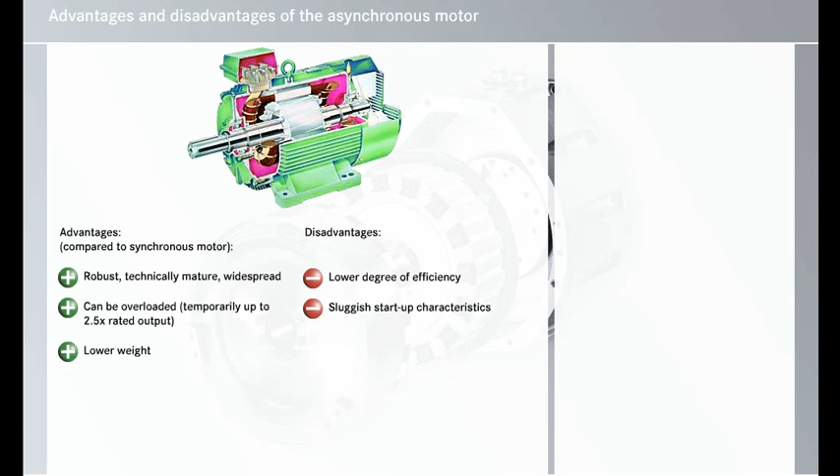As the rotor comprises nothing more than the light cage, the asynchronous motor weighs less than the synchronous motor. The disadvantage is the lower efficiency compared to the synchronous motor, particularly when starting up. This is because the rotor field needs to be generated first, making it impossible for the motor to respond spontaneously.

Asynchronous motors have been used extensively as robust electric drive units, both in some types of hybrid vehicle as well as in fuel cell and electric vehicles. Today, though, preference is given to the synchronous motor for passenger car applications.